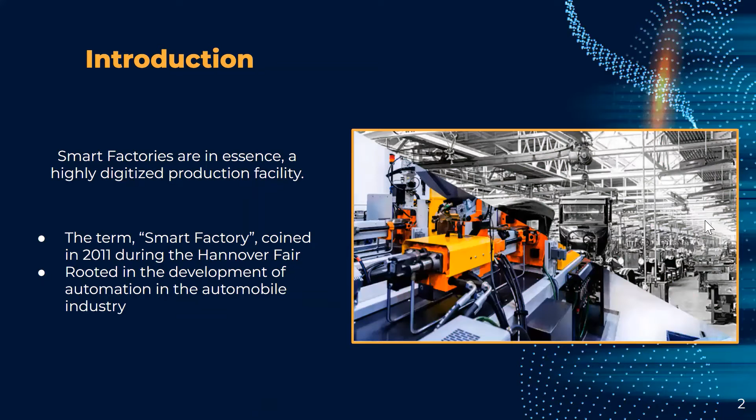Now we will give some background information on the history and development of smart factories. The history of smart factories is rooted in the history of automation, which first began to take shape in the early 20th century on the factory floors of automotive companies like the Ford Motor Company.

In 1913, Henry Ford developed the moving assembly line, which would forever change the way products were manufactured. The genius behind this new method developed by Ford was to bring work to the workers instead of having workers go to their work. This new process allowed for vastly increased production rates and allowed Ford to decrease the price of their product, increasing sales.

Workers focused on developing one single piece of the car that they would add and continue this process over and over for each car that passed them on the line. The similarities here between the Ford moving assembly line and smart factory development can be seen quite easily. One human worker developing one part quickly transitioned over the 20th century into a robotic worker doing the same in the 21st.

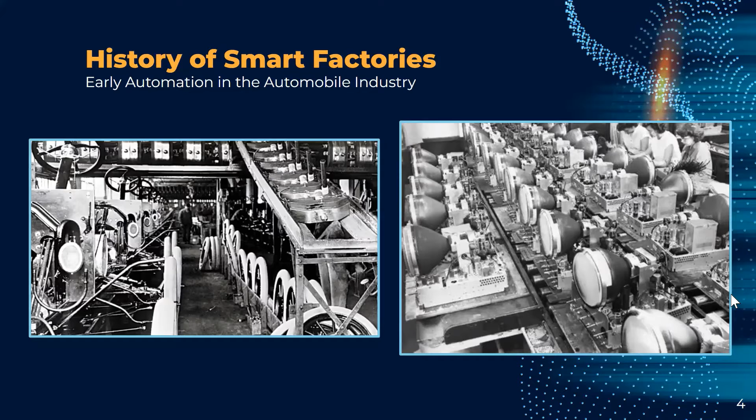From early automation, a rapid development would swoop over the manufacturing world in the mid-1900s with the development of new production line control methods.

Automation in manufacturing would see another explosion in development following the so-called Third Industrial Revolution, which occurred during the mid-1900s. This period of innovation ushered in advanced computing technologies. Technologies like programmable logic controllers, invented in the mid-1960s, allowed for greater remote control of manufacturing lines.

The final stage to be examined in the history and development of smart factories is the so-called Fourth Industrial Revolution, where we currently stand today. This level of manufacturing innovation and development represents the full use of computer technology to create full task automation. Robotics are now capable of handling advanced human tasks that require independent decision-making.

Crucial to this development is the implementation of robotic intelligence gathering called machine learning. Machine learning is seen as the most fundamental function in the advancement of artificial intelligence and smart computing. This continues into smart factories.

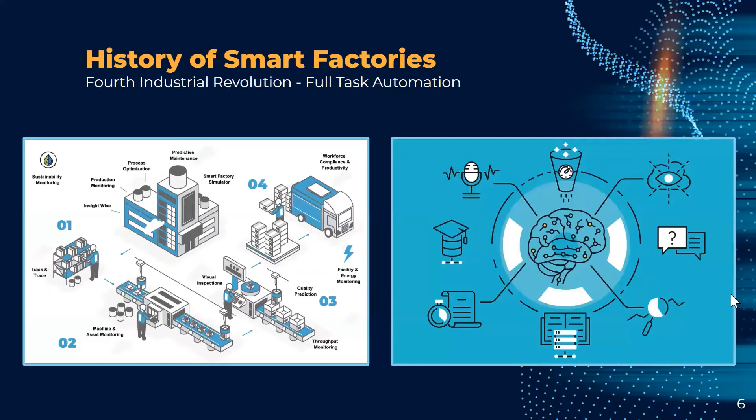Building a factory that continually becomes smarter and more efficient over its lifetime is the ideal growth production model for any manufacturing business. In addition, new advances in data storage technology allows for massive amounts of data information to be stored, streamed, and transferred with extreme speed and efficiency. This allows for a more interconnected facility that can literally talk to itself, speeding up part production while simultaneously reducing waste. Smart factories will serve as a cornerstone and model for factories and manufacturing for the foreseeable future.

The automotive industry has had an increasing need for implementation of new methods and technologies that can handle recent problems for automakers. Continued safety violations and employee endangerment has been an increasing problem with the rising demands for automobiles and automobiles that are more sophisticated.

Right now, the demand for cars is still high as the pandemic mindset relaxes and people venture back out into the world. Not only does the demand for cars remain, but the speed of this changing demand is high. Production needs need to be fast.

Employees operating new heavy machinery is far more dangerous and results in automakers needing to deliver compensations and paid leaves for workers often. Companies are losing more money than they'd like to, and costs are being translated to customers.

COVID has also brought about new complications for automakers regarding remote work and the dwindling labor supply. More and more employees are looking to work remote, and technician and engineering jobs in a lot of automotive facilities cannot be remote as much as other types of jobs.

On top of these aspects are increased complexities of products that need more precision than human coordination, especially with electronics and advanced vehicular systems. With this complexity comes more room for error or defects that are undesirable, both consumers and producers. So any way that this shortcoming can be mitigated is needed for automotive manufacturers.

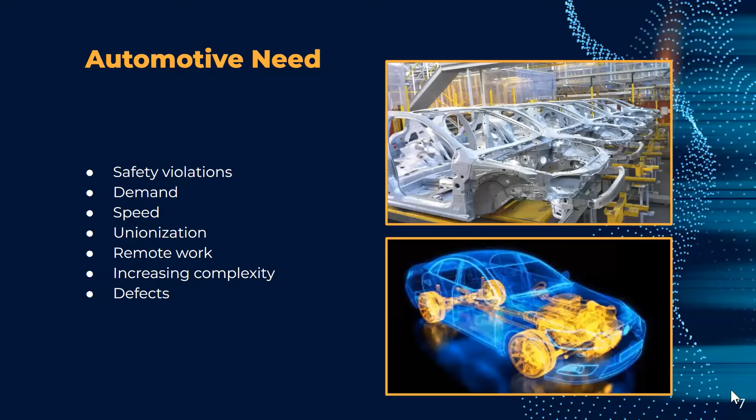Smart factories, or the implementation of smart manufacturing into automotive factories, is the route that automakers are taking to fix all these issues. We will now discuss our case study analysis in North America, Europe, and Asia.

The first case study will be diving into North America's approach to integrating smart factories and how it has affected the specific motor industries. For this study, we will be looking into Ford Motor Company.

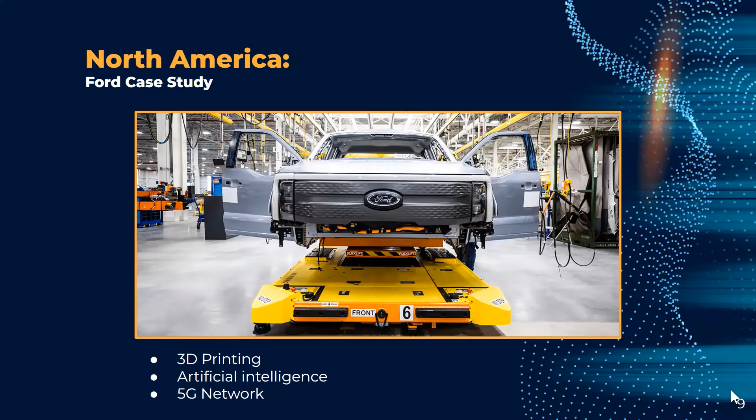Ford has always been known for the willingness to adapt and implement new technologies, as well as be a part of new innovation. Some of these upcoming technologies that Ford will be implementing are 3D printing in their advanced manufacturing center, artificial intelligence in the Ford transmission plant, and 5G network in their electric vehicle center in Michigan. To integrate a better manufacturing system, they implemented the Ford Automation Software Template, FAST.

FAST created a digital template to standardize process softwares, process configurations, and quality monitoring. This allowed for plants all over the world to use a singular system that can be updated and adjusted as one. A critical aspect of FAST is the software process configuration tool, which allows for centralized access to every assembly station as well as the recipe being used to assemble parts.

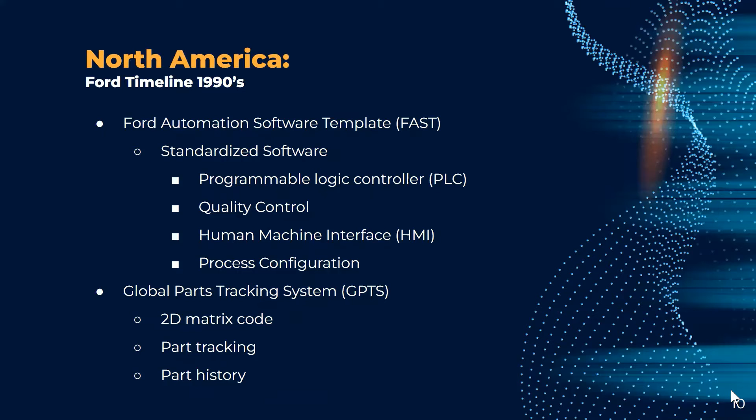Another system put into place was the Global Parts Tracking System. This system worked with FAST to track parts throughout the plant. Each part was given a 2D matrix code and is scanned when it enters each cell. This tells the system exactly which cell this part has been to and which gantry it has crossed. GPTS allows for better error detection and problem identification through the tracking logs.

3D printing is one of the many new advancements in smart factories in the last few years. Ford has begun rigorous testing of 3D printing in the new Advanced Manufacturing Center. This center houses 23 3D printers from 10 different additive manufacturing companies, including HP and EOS.

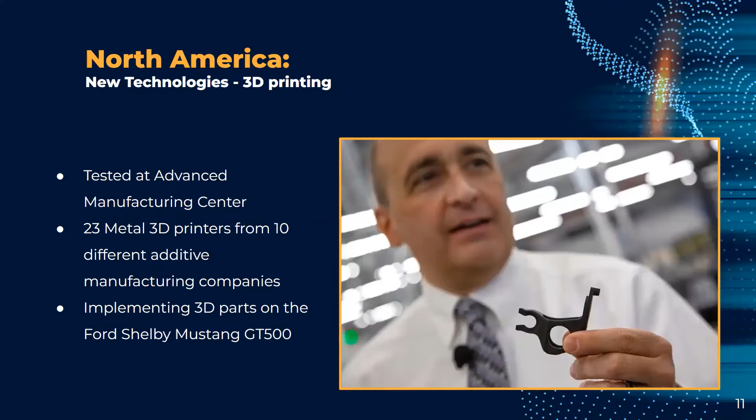Along with that, Ford has now slowly started implementing these 3D printed parts into high-end cars. On the right, you can see Harold Sears, Ford's technical leader at the Advanced Manufacturing Center. He's holding the 3D printed bracket that holds the brake line for the 2019 Ford Shelby GT500 Mustang.

In recent years, Ford has invested a lot of time and money into developing artificial intelligence in their robots. They've collaborated with Symbio Robotics, an AI company that specializes in implementing AI in industrial robots to outperform the status quo, an example of this being within the Ford transmission plant in Michigan.

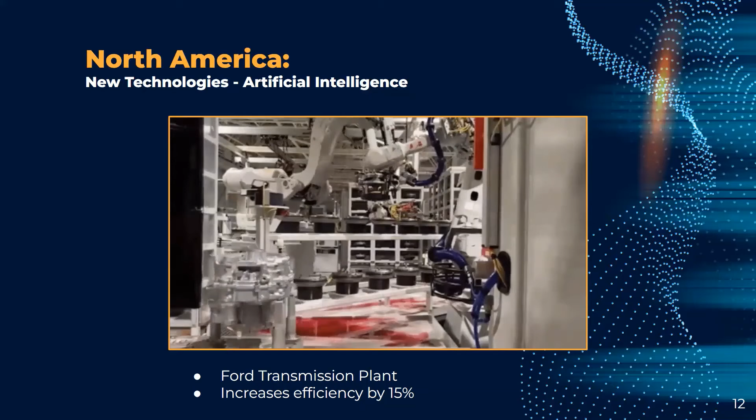Within this plant, AI is integrated within its robots, such as the one shown above, for assembling torque converters. The AI program analyzes the last 100 attempts to learn how to maximize the efficiency of each movement. Data has shown that the AI has allowed this section of the manufacturing plant to operate 15% faster.

5G will be integrated in their electric vehicle center in charge of producing the new 2022 Lightning Ford F-150. 5G allows for ultra-high speeds, extreme low latencies, and massive connectivity.

The faster network allows for employees on the production line to use tablet computers to send and receive information about equipment status. The machines and automated robots will be equipped with 5G networks to allow for high volume data transfer for real-time data capture and analysis. This will allow for instant feedback and fast reaction times between the machines and control systems.

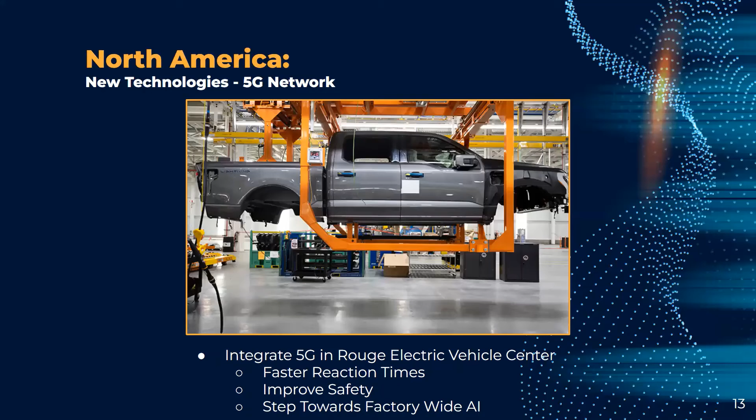The cloud will also allow for remote expert support, and more importantly, it opens the door to AI technologies and using them towards improving precision, efficiency, and safety.

In Europe, several organizations are adopting smart factories into their company and business model as not only a way to better their products, but also survive among the competition.

Volkswagen has created an industrial cloud that provides the utmost interconnectivity between their facilities. The industrial cloud works by integrating data on every level and relaying this data to a processing platform that can interpret it. Everything from the integrated robotics on the shop floor to the conveyor belts and material transportation are monitored for correctness and timeliness.

This helps communicate to other integrated components about the schedule and processes so that production lines can operate properly when needed, and without the manual input of workers.

The cloud also relies on artificial intelligence that crunches all the data and can digest it to recognize issues in production or errors along the way that need human intervention. The artificial intelligence also works by self-enhancing the manufacturing processes and determines points of inefficiency, and can change the timing or schedule of automated machines.

The data gathered from the AI is also put into sophisticated models that can help inform management about long-term operations, productivity, and the lifetime of robotics. The integration of this technology has been very beneficial for Volkswagen and has proven to improve the changeover speed of various production lines.

The BMW Group has taken a tech-heavy approach to smart factories, changing their production to increase speed, efficiency, safety, and complexity. BMW has fully automated much of their more menial tasks, such as part transfer and equipment change, utilizing autonomous trains and transfer bots that move materials across BMW facilities. This saves time and man-hours, allowing employees to focus more on skilled work.

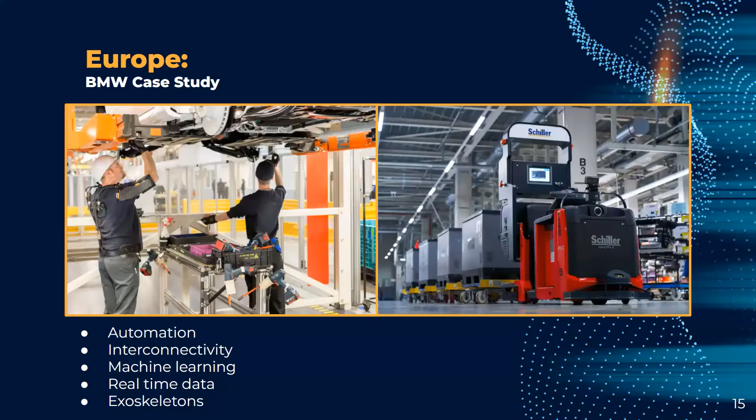Finally, BMW has also begun using exoskeletons as a way to boost worker performance by allowing them to carry more weight and perform certain tasks for longer with the support of the exoskeleton.

Tesla, an American company, has a new European facility in Germany coined the Gigafactory. This facility is new and the epitome of a smart factory in how it is powered, operated, and incorporated into manufacturing. The Gigafactory has its own on-site transportation system that moves employees from various parts across Germany, as well as different parts of the factory, increasing employee integration into the company and ensuring they can partake in their duties.

The facility is also very sustainable, powered by solar arrays located on the factory roof itself. Sustainability is an aspect of smart factories that more companies are turning to. Tesla's Gigafactory is also one of the few car factories that makes their own batteries. The Gigafactory is not just a car factory, but an innovative technology facility.

Our choice of case study in the Asia region is Toyota. Toyota is one of the leading automobile manufacturers in the world, and they have been constantly developing their manufacturing strategy and technology to meet growing demands across the world, while maintaining the high quality products that have been a star principle of Toyota since its founding day.

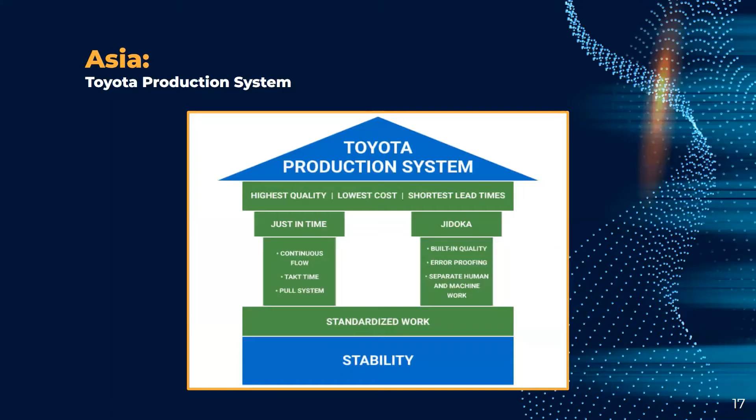The just-in-time system was derived from a comment by Toyota founder Kiichiro Toyota, that the best way to gather automotive parts is just in time, establishing Toyota's pull system of production. Jidoka, loosely translated as automation with a human touch, was created by Sakichi Toyota during his research into automation development. Jidoka involved stopping the process automatically when production went wrong, error prevention, and total productive maintenance for quality.

Into Toyota's development timeline: in the 1940s and 1950s, facing post-war effects and a collapsing economic system, Toyota needed to adapt to raise productivity and achieve large volume production. Their first pull system of production was adopted in 1948, a foundation for the future just-in-time system. In 1960, Toyota promoted mechanization and a conveyor belt system to produce only necessary parts, marking their first step in automation migration. Simultaneously, Toyota launched a TPS implementation program across all plants in 1960.

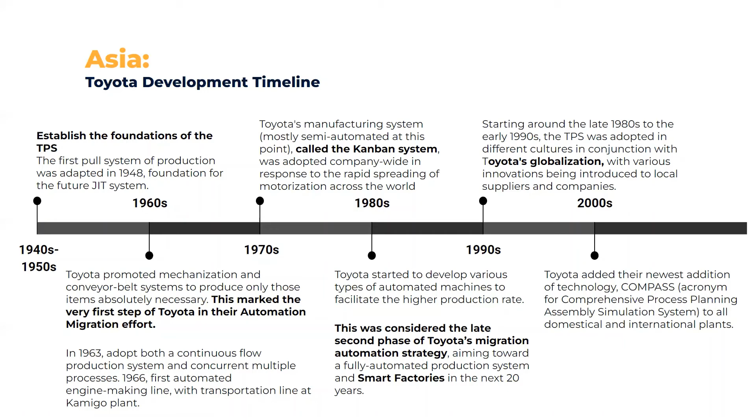In the 1990s, while ramping up their globalization manufacturing network, Toyota introduced automated part supplier mechanisms into their production system to flexibly meet the requirements of just-in-time theory. They also adapted TPS practices to different cultures alongside their globalization scheme, with various innovations introduced to local suppliers and companies. In 2000, Toyota added the newest technology addition, COMPASS, which would be discussed later as their stepping stone into the age of smart factory.

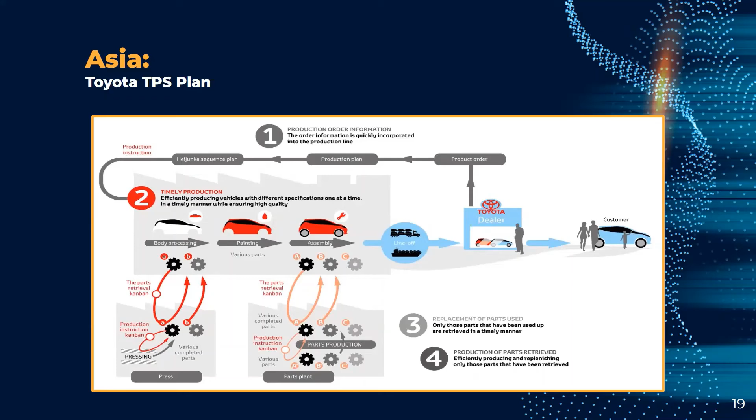In the beginning of the 2000s, Toyota added the newest addition technology, COMPASS, a system that stored time and part location in a data table to determine the shortest point-to-point distance in order to adjust the process due to errors or design changes in the smart factory.

This was a concluding step of Toyota's automation development, an integral technology for the soon-to-be integrated smart factory of the 21st century. With their experience in manufacturing since the 1930s, Toyota quickly realized current automation systems could be improved drastically with not only COMPASS, but also the implementation of IoT and cloud-based systems. They made remarkable progress adapting real-time data collection and data analytics to support their lean system and amplify Kaizen while conforming to their TPS principle.

Now we're going to discuss their economic growth since the implementation of TPS. Around the late 1950s and early 1960s, TPS implementation started to run at Toyota plants, and Toyota started reaching the production rate of 100,000 vehicles annually for the first time in history.

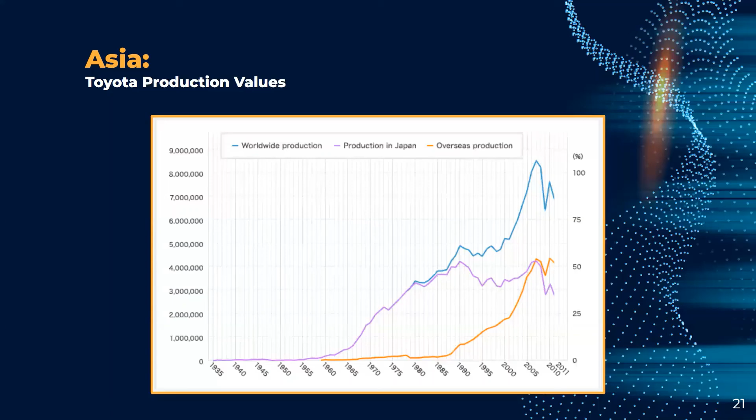Now we will discuss our findings and final thoughts on smart factories. From our 3 case studies, we composed a list of similarities between all 3 smart factories. The 2 main similarities were the use of cloud-based data sharing and the integration of AI.

Cloud-based data sharing controls networks to increase data transmission and streamline factory standards and data. This allows factories to operate as a whole, enabling factory-wide monitoring to increase production rates and efficiency. Another aspect was the use of AI technology with cloud-based networks to more efficiently optimize a sector or even a whole factory.

The AI analyzes data from the cloud and determines what can be done to reduce times and unnecessary actions. This has been implemented in various stages across the 3 case studies, all at different levels, but they all focus on increasing production rates within a factory.

In addition to our analysis of current smart factory implementation in North America, Europe, and Asia, we also looked at studies examining smart factory use as a whole. Two major areas of interest were: are companies actively interested in further developing smart factory initiatives, and what concerns do manufacturers face when looking to implement them?